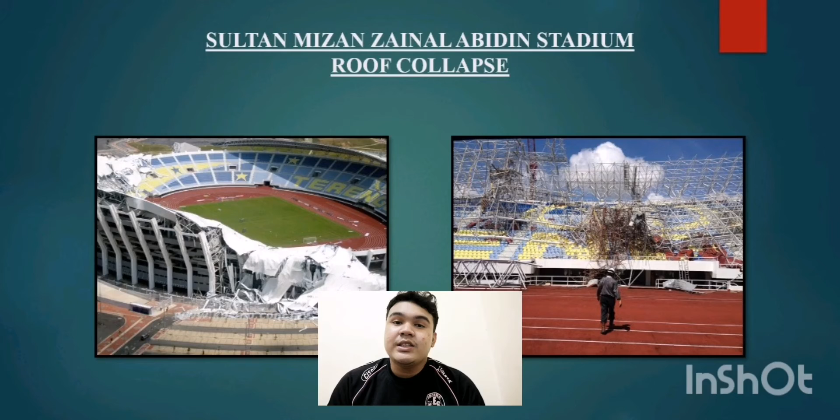Okay. So today I want to explain about the introduction of Sultan Mizan Zainal Abidin Stadium. Sultan Mizan Zainal Abidin Stadium is a multi-purpose stadium built by a South Korean construction company in Kuala Terengganu. It is the focal point of the Terengganu Sports Complex together with the adjacent mini stadium, and it was primarily utilized for football matches. The 50,000 seat stadium is named after Terengganu's current ruler, Sultan Mizan Zainal Abidin.

The RM300 million Sultan Mizan Zainal Abidin Stadium in Gong Badak, Kuala Terengganu, billed as the state's pride, experienced a huge setback when its roof collapsed just a year after it opened. No one was hurt in the 9 a.m. incident. Nonetheless, the large steel roof that covered half of the stands collapsed, destroying the venue. There was no one inside, but the failure could have easily injured a large number of people given the stadium capacity of 50,000. Only a few cars parked outside were demolished.

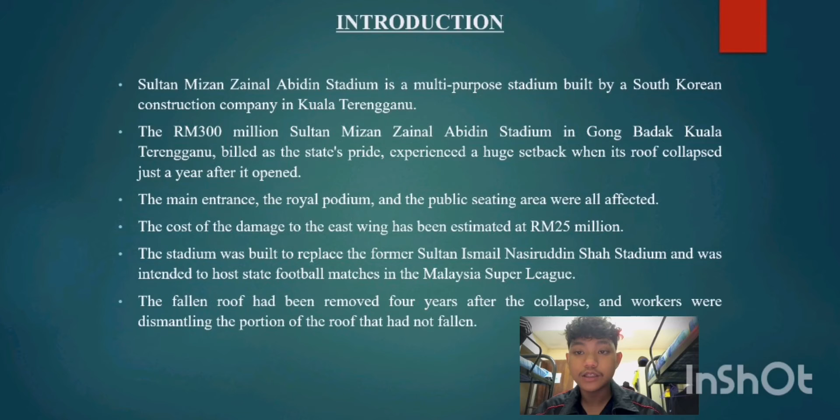The stadium design and construction were completed on a tight timeline to ensure that it was ready for the 2008 SUKMA Games. The roof structure was also altered to light frame steel construction late in the design process, implying that the effort spent designing it was at best questionable.

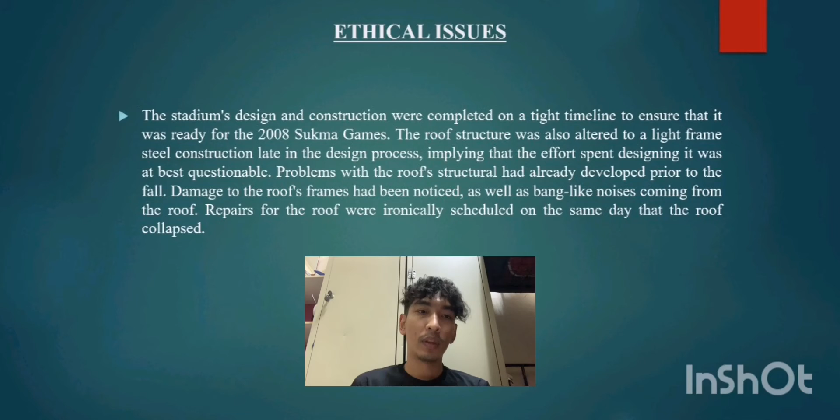Problems with the roof structure had already developed prior to the fall. Damage to the roof frame had been noticed, as well as bang-like noises coming from the roof. Repairs for the roof were ironically scheduled on the same day that the roof collapsed. Workers were cleaning and maintaining the building at 9 a.m. when they heard a massive smashing sound.

The outside support from the massive cantilever roof had broken, and the roof had fallen on the stadium sitting below. Fortunately, no one was wounded in the collapse because the workers in the stadium were not under that roof. The rubble damaged a few vehicles outside the stadium.

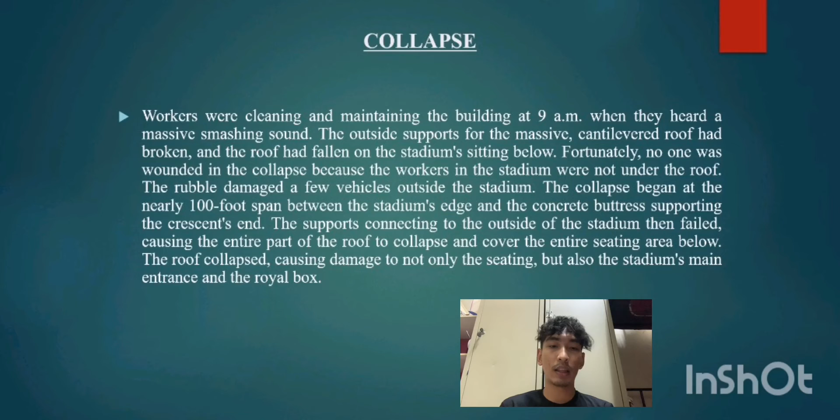The collapse began at the nearly 100-foot span between the stadium edge and the concrete buttress supporting the crescent end. The support connecting to the outside of the stadium then failed, causing the entire part of the roof to collapse and cover the entire seating area below. The roof collapsed, causing damage not only to the seating but also the stadium main entrance and the royal box.

Okay, so the next one is ethical issues with that incident that led to the collapse of the stadium roof. The first one is major issues include mistakes at design level. The second one is inappropriate choice of materials. The third one is incompetency of staff involved in construction. Number 4 is poorly constructed roof and lack of quality supervision.

Number 5, the skills of the staff hired to construct the roof were inadequate as the roof structure was very complex. Number 6, the quality of work was not up to standard as required by the design. So the roof collapsed because the engineers' and designers' design did not follow the specification. Number 7 is the complex design of the roof and the wide span required more detailed analysis.

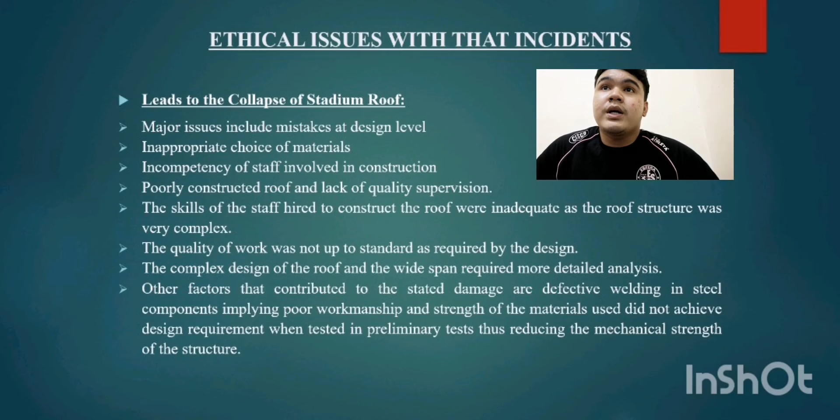The last one is other factors that contributed to the damage are defective welding in steel components, implying poor workmanship, and the strength of the materials used didn't achieve design requirements when tested in preliminary tests, thus reducing the mechanical strength of the structure.

So now, the action taken from the incident: the design was inadequate with insufficient safety measures. The designer failed to take into account the full consideration of the support condition of the roof structure. Next, the roof was erected poorly, resulting in a misaligned geometry. There was no quality control for safety measures at site. Also, materials and quality of workmanship did not meet specification.

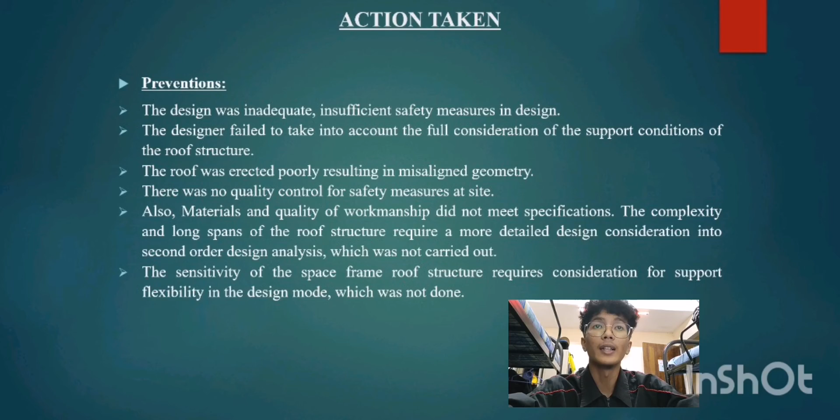The complexity and long spans of the roof structure required a more detailed design consideration into second-order design analysis, which was not carried out. And the last one is the sensitivity of the space frame roof structure requires consideration for support flexibility in the design model, which was not done.

Defective welding of steel components, indicating bad manufacturing or prefabrication work, a poorly thought out erection procedure of attaching the roof structure components, and no checking during the interim stage of erection. Temporary supports were insufficient. The project management staff appears to be lacking in quality control.

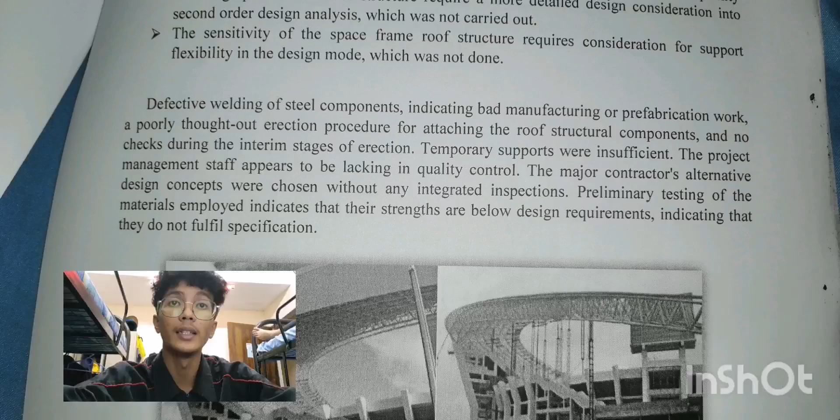The major contractor's alternative design concept was chosen without any integrated inspection. Preliminary testing of the materials employed indicates that their strengths are below design requirements, indicating that they do not fulfill specification. So yeah, we jump into the conclusion.

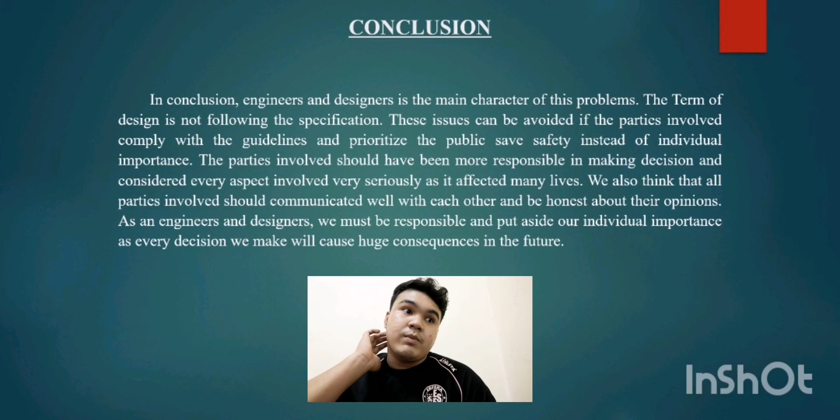So in conclusion, engineers and designers are the main characters of these problems, in terms of the design not following the specification. These issues can be avoided if the parties involved comply with the guidelines and prioritize public safety instead of individual importance. So when engineers and designers want to do something, they actually need to think about the guidelines and the priorities.

They can't think about themselves. Yeah, and the parties involved should have been more responsible in making decisions and considered every aspect involved very seriously as it affected many lives. We also think that all parties involved should communicate well with each other and be honest about their opinions.

As engineers and designers, we must be responsible and put aside our individual importance, as every decision we make will cause huge consequences in the future.